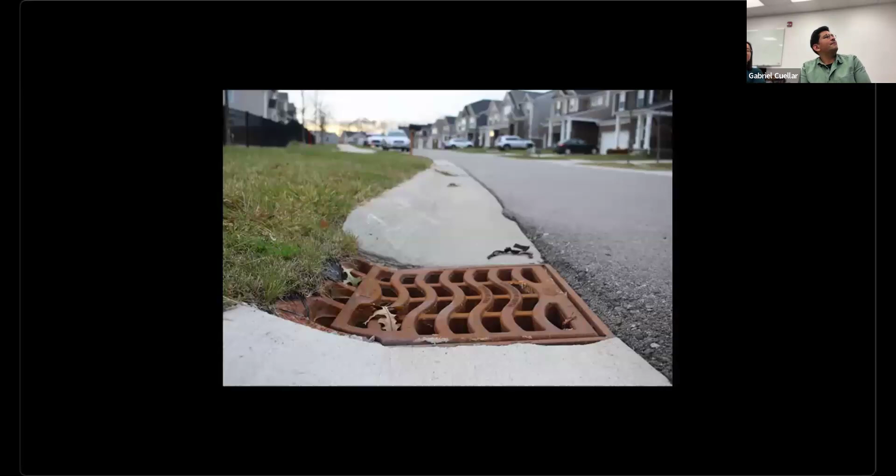As the city of Ann Arbor develops its new comprehensive plan, disagreements over zoning strategies have emerged between pro-density advocates and neighborhood preservation groups. Considering the broader environmental, social, and historical context of this debate could help guide decision makers.

The Anishinaabe have lived in southeast Michigan for centuries and used these lands around the Great Lakes for hunting and gathering. They call the water Nibi and understand it as life itself, not just a commodity to be used.

When European settlers arrived, the colonists divided up the land with the Jeffersonian grid, with no regard for natural features. Ann Arbor's industrialization and residential development has led to degraded water quality, destroyed habitat, and increased sediment load in the watershed.

In addition to the history, assessing the current stakeholder network was key to developing any design solutions.

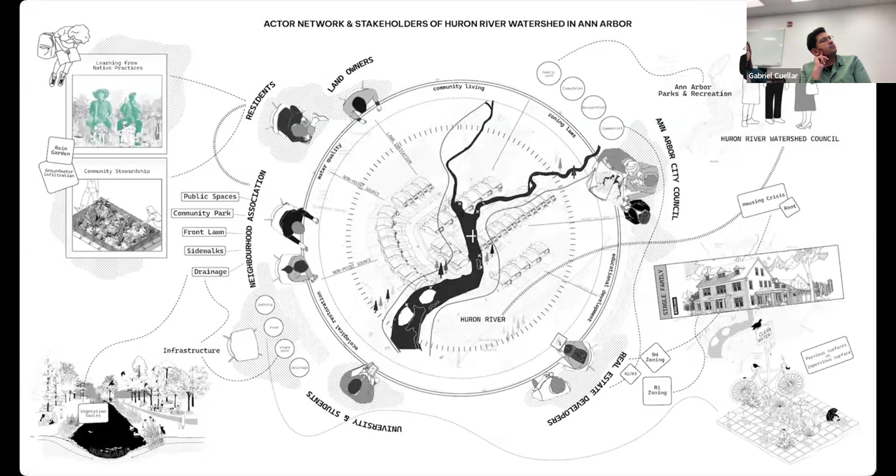Ann Arbor is primarily zoned for residential uses, especially low-density single-family residential, or R1 zoning. Currently, the city requires developers to meet specific stormwater management requirements. In most cases, developers meet the requirements through engineered solutions that socially and environmentally disconnect the community and the land from its role in the watershed.

Adjusting development requirements could transform R1 zoning neighborhoods from places of social and environmental disconnection to places of connection.

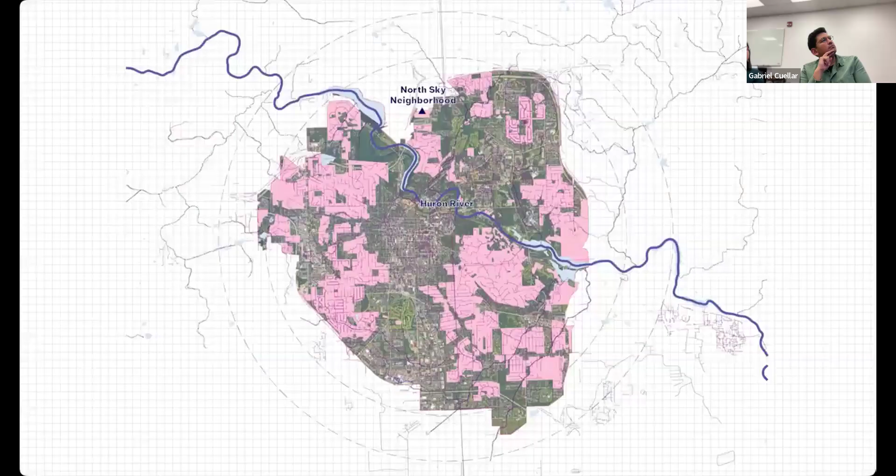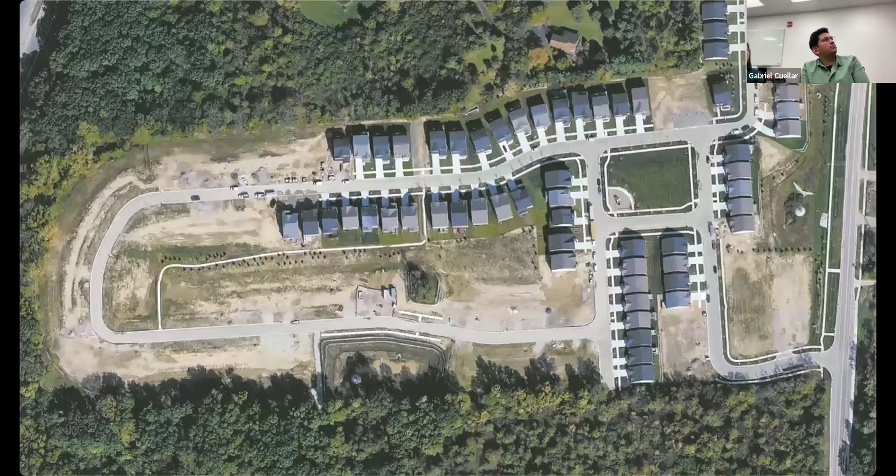As a case study, we selected the North Sky neighborhood, a single-family residential neighborhood in Northwest Ann Arbor. This development was built in 2018 and is largely characterized by its car-centric form, uniform homes, two-car garages, and expanses of lawn.

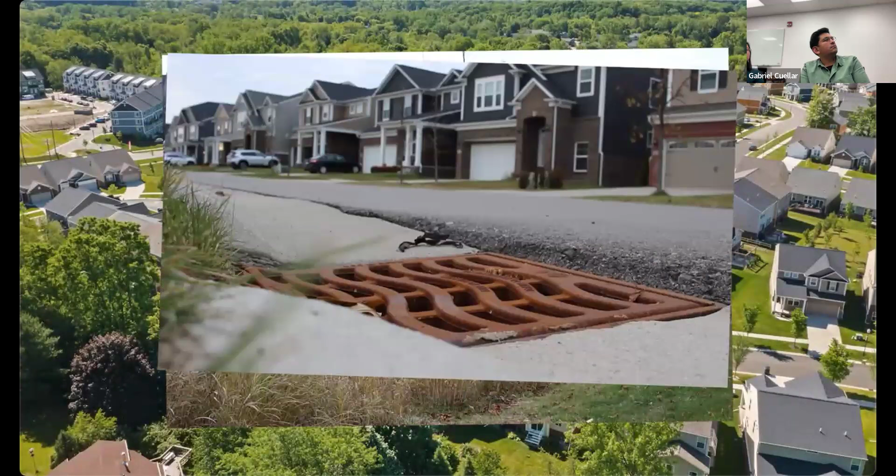Like most R1 developments in Ann Arbor, the stormwater is treated via engineered swales and retention ponds, undergrounded stormwater management, and monocultures of lawn.

Manicured lawns have become a symbol of home ownership in the United States. However, these lawns require substantial irrigation, contribute to water pollution by chemical use, and lack habitat for local pollinators. Our first strategy gradually transforms these lawns into an ecological patchwork of rain gardens.

Like many urban developments in Ann Arbor, a homeowners association currently maintains the turf throughout the neighborhood. To implement the first strategy, the HOA will transform the lawns to rain gardens within all community shared spaces, while leaving a small area of lawn in the community park for children to play.

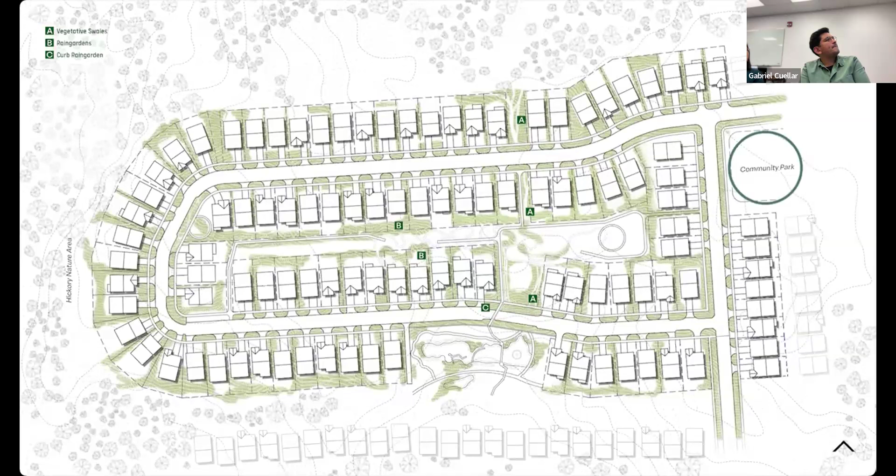Our strategy includes having public gardens, rain garden curbs, and shared vegetation along with traditional grass conversion. This will lead to lower irrigation costs, stormwater credits, and better aesthetics, inspiring other neighbors. As the ecological patchwork grows, the community gains biodiversity, healthier soils, and a strong identity connection to the watershed.

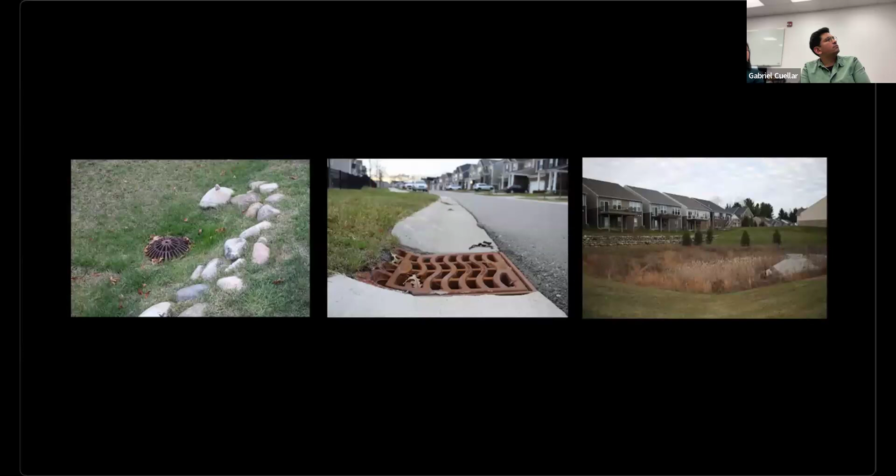Our second strategy reimagines how stormwater travels throughout the site. As opposed to traditional methods of hiding stormwater in underground pipes and surface drains in the turf, our intervention creates a swale wetland network that also acts as a stormwater commons for public use.

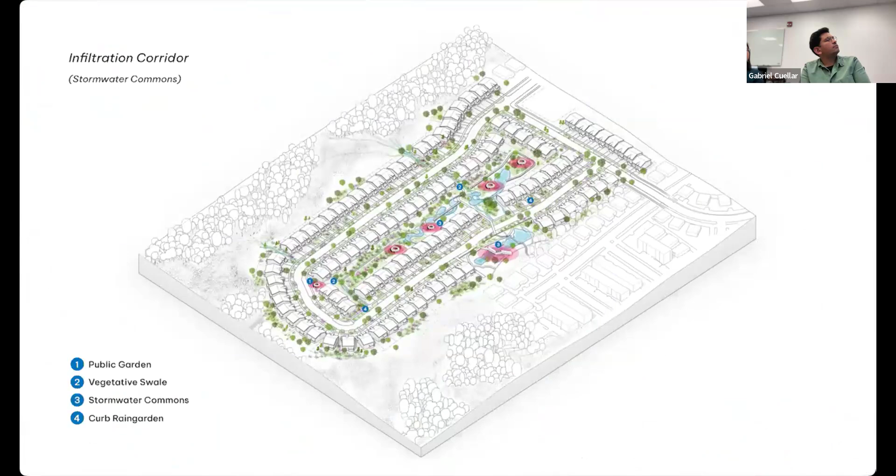The corridor decentralizes the runoff and creates moments of interaction with water throughout the site. The infiltration areas absorb more water into the ground, which allows the large retention pond on the south side of the site to become smaller and act as a community public space rather than a fenced-off basin.

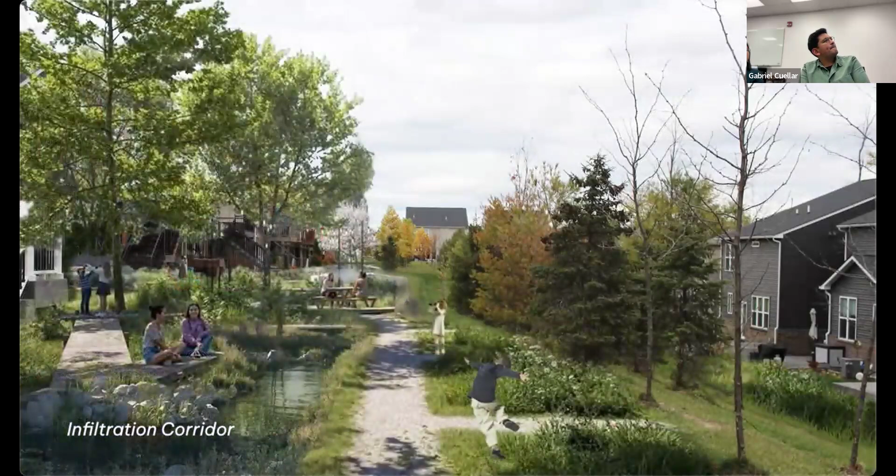These community spaces instill a feeling of shared responsibility for the watershed and their local ecology. Our strategy acts in multiple segments with the swale network to guide runoff and community spaces for people to interact more closely with water.

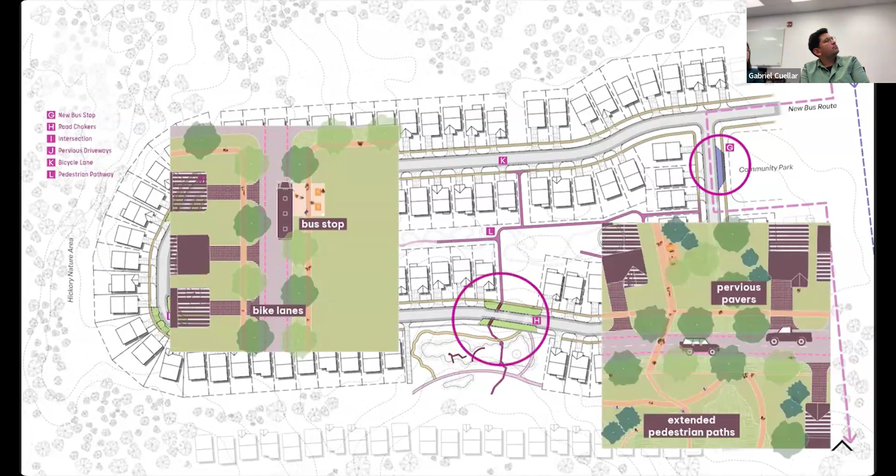Our third strategy provides mobility modifications to encourage alternative modes of transportation and reduce the negative impacts of car centricity. To encourage use of public transit, we propose introducing a new bus stop to routes 22 and 63 at the existing community park. We also recommend adding bike lanes and expanding the existing pedestrian pathways throughout the public spaces.

To reduce negative impacts of car centricity, we propose replacing impervious concrete driveways with pervious pavers. Additionally, road chokers will be added at key pedestrian crossings to slow car traffic and beautify the pedestrian spaces.

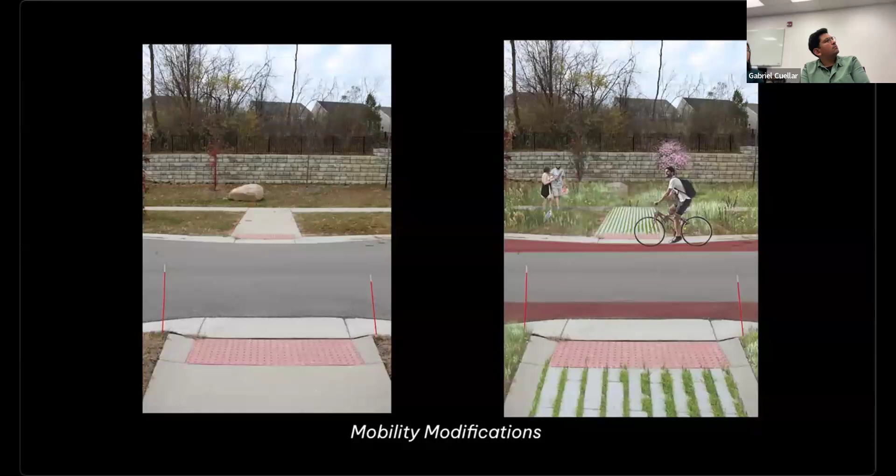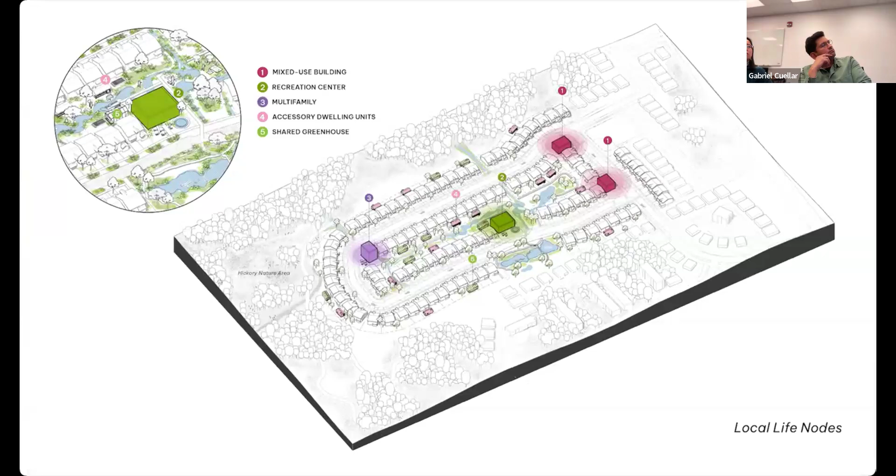Our final strategy aims to transform R1 bedroom communities into places where daily life happens locally. This strategy could be implemented into future urban developments, but we have reimagined what this would look like within North Sky neighborhood. A neighborhood community center becomes a hub for gathering, workshops, and casual interactions. Small businesses like cafe and corner market anchor walking trips and build social ties. These nodes increase walkability, allow more density, and reconnect residents to the neighborhood community.

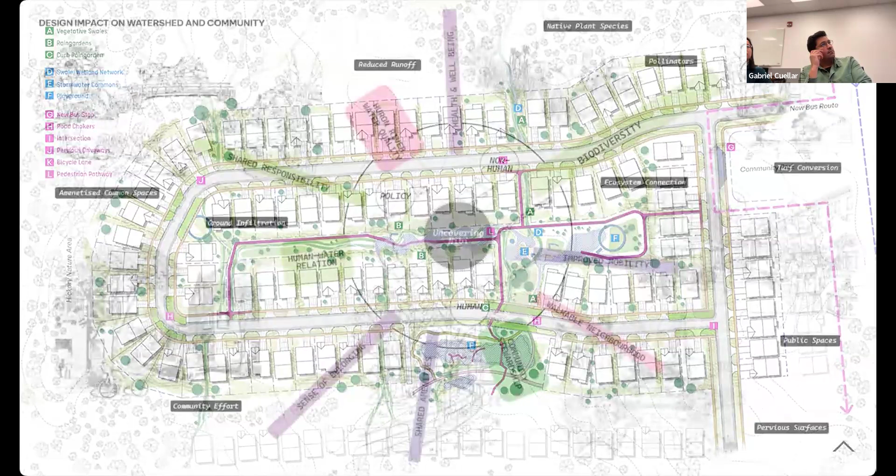All of our design strategies can be used individually or as a combined system to reconnect the residents of Ann Arbor with the Huron River watershed. The North Sky neighborhood gives us an opportunity to see the impact of our design and rethink how one residential area can become a model for many.

A place where an ecological patchwork, infiltration corridors, mobility modifications, and local life nodes build our connection to the watershed. These scalable strategies reveal what neighborhoods across Ann Arbor can look like when stewardship and watershed guide design.

The next presentation is... I will share. You introduce yourselves? Yeah, okay.

Hello everyone, I'm Pallavi, I'm from Pakistan, Karachi. I'm Dwanil from India, Mumbai. Hi, and I'm Mahalij, and I'm from Pakistan.

Today we are discussing the tension that is caused between the university and the city. We were trying to understand how the future of the city is developing, and how the university is about to expand. So how can we understand the terms of such development and what impact it has on Ann Arbor itself? Thank you for the opportunity.

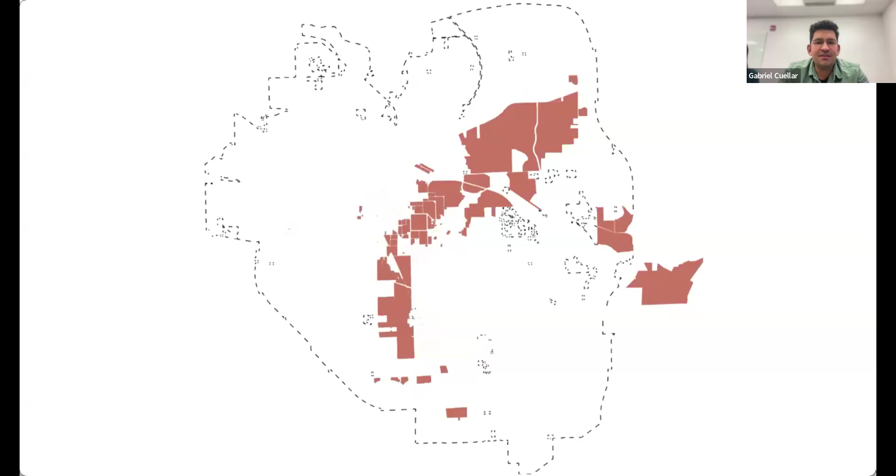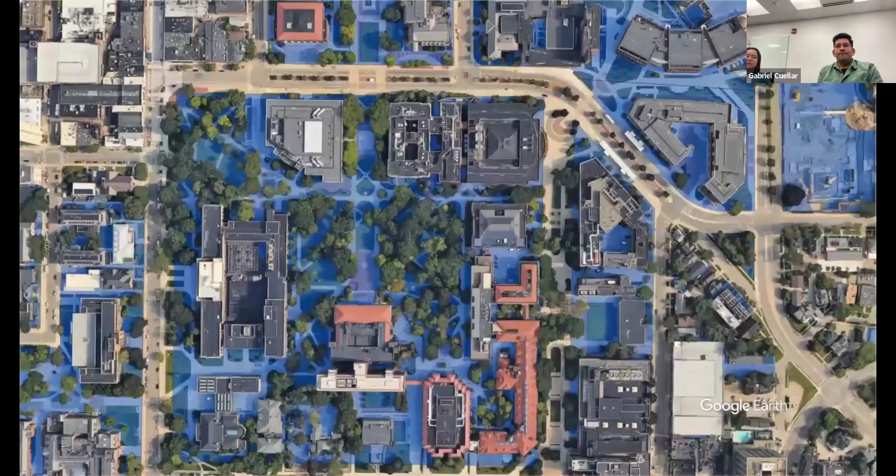One, two, three. Ann Arbor is shaped by two worlds growing side by side, the University of Michigan and the city. Their boundaries collide, overlap, and divide the urban fabric. Our project studies the tension between the city and the university. The timeline shows how the University of Michigan has expanded continuously since arriving in Ann Arbor in 1837.

Early land grants and constitution tax exemption allowed the University of Michigan to grow without contributing to the property taxes. Over the decades, more buildings, more students, more jobs, and more services turned the campus into a microcity of its own. But each expansion also meant increasing tax loss for Ann Arbor. With less revenue, the city faces underfunded infrastructure, delayed maintenance, rising pressure on services, and gradual spatial decline.

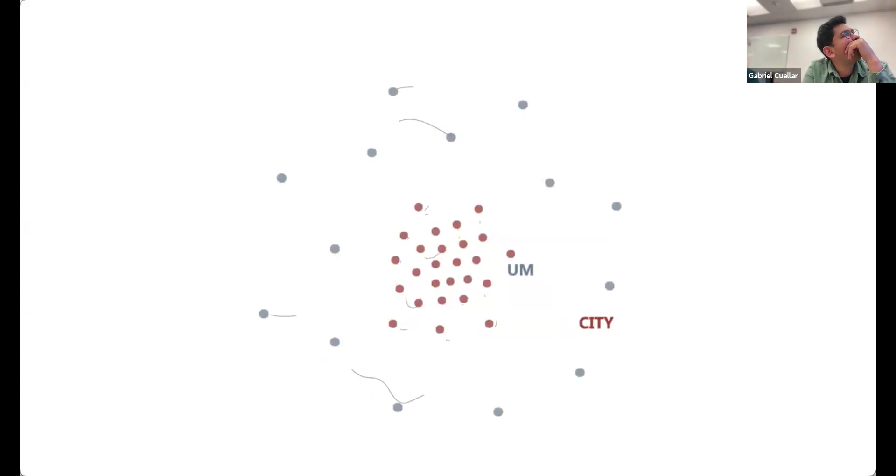So the university's growth and the city's strain unfold together, and this tension sets the stage for spatial differences that follow. Quality: the university maintains a high quality, well-serviced environment while the city neighborhoods face lower upgrades and resource gaps. Quantity: the University of Michigan expansion captures more land for academic facilities, reducing the amount of taxable land available to support the city.

Scale and car dependency: while campus students experience a compact microcity, outside it, Ann Arbor's scale stretches out, generating longer commutes and heavy dependency on personal vehicles. Accessibility: the campus is highly walkable and service dense, while many parts of Ann Arbor rely on limited transit and car-oriented routes. Property wealth: as campus demands intensify, surrounding housing becomes more expensive, pushing affordability farther out.

This diagram makes visible how divided infrastructure is within the system and influencing the planning decisions, shaping the future expansion, and accelerating the suburbanization instead of strengthening the urban core.

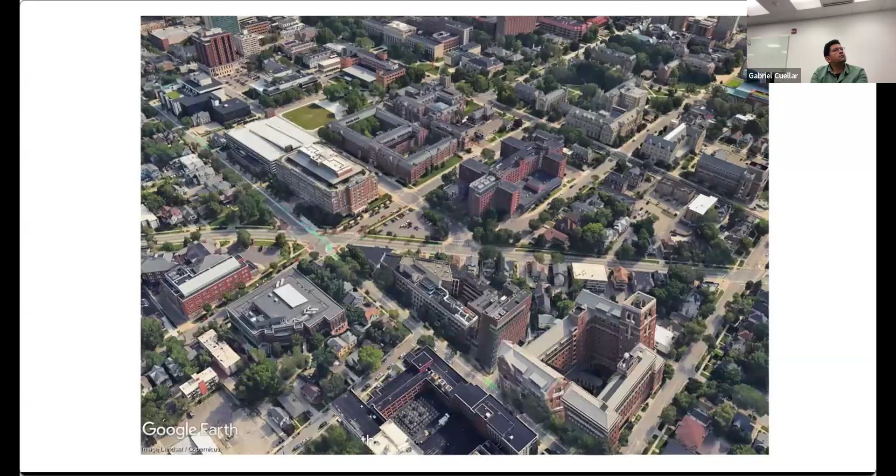If such differences in developing the infrastructure continue, it would completely change the current morphology of Ann Arbor, making it completely lean on the university campus for its growth.

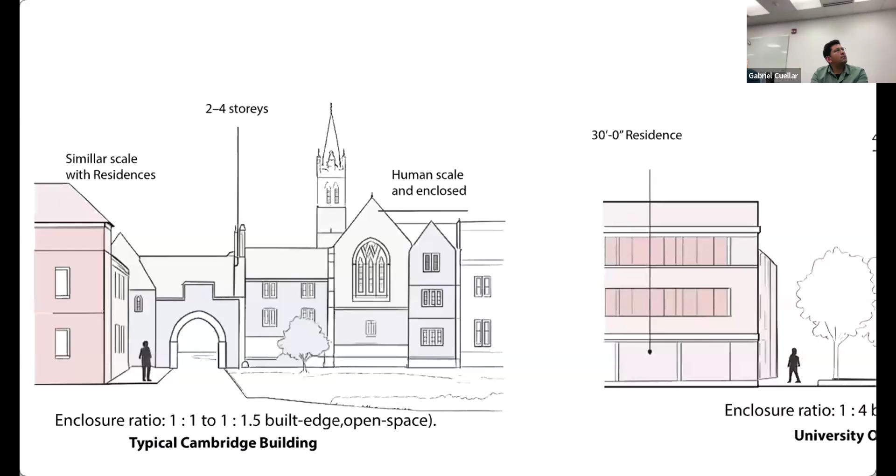We did a case study of University of Cambridge, which is scattered throughout the city to create a vibrant urban experience. As you walk, you see thoughtful design elements like rain gardens and improved walkability that promote community life. In contrast, University of Michigan feels much more monumental, while Cambridge feels much more human-scaled with the university.

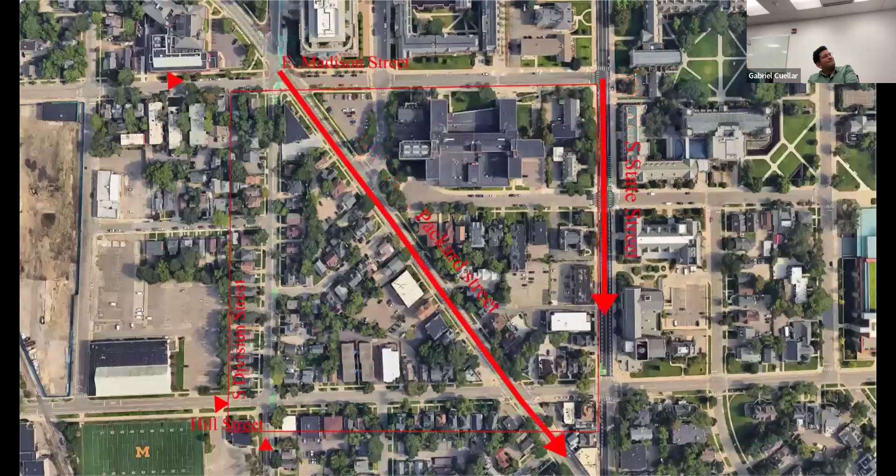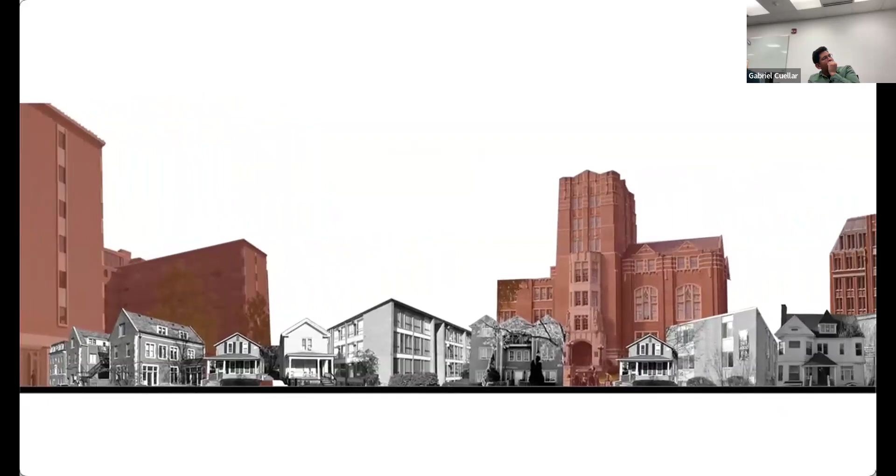The site we have chosen is the South Quad area, located right beside Michigan Union and Central Campus. The primary roads connecting to the site are Packard Street and State Street. It is surrounded mostly by small-scale residential buildings, typically 2 to 3 stories, while university buildings are 8 to 9 stories tall. This contrast creates edges that feel abrupt rather than gradual, reducing walkability and making the street experience feel less comfortable or human-scaled.

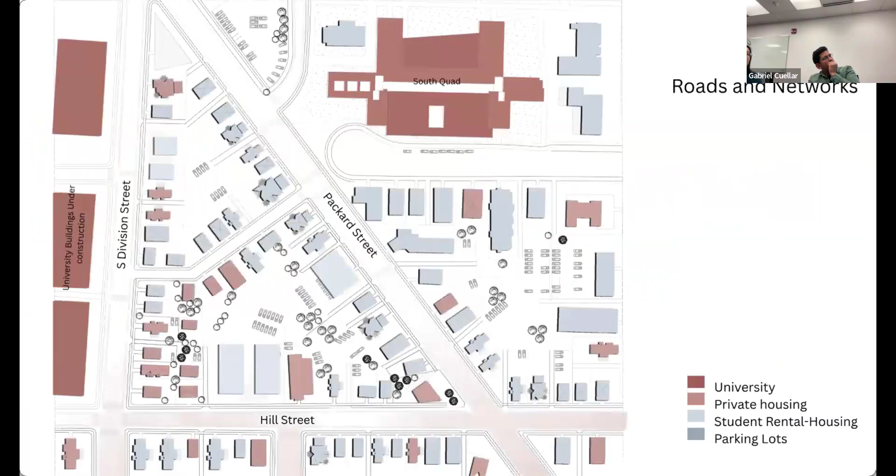Looking at the plan, it has 90% of its population as student housing and 10% private owners, with a parking lot situated in the center.

Our vision connects the university and city through three key pieces. The first is the university cluster, where we place small thematic academic and housing hubs within the neighborhood with public cafes and courtyards, creating a positive campus presence where people live. Second is the civic courtyards.

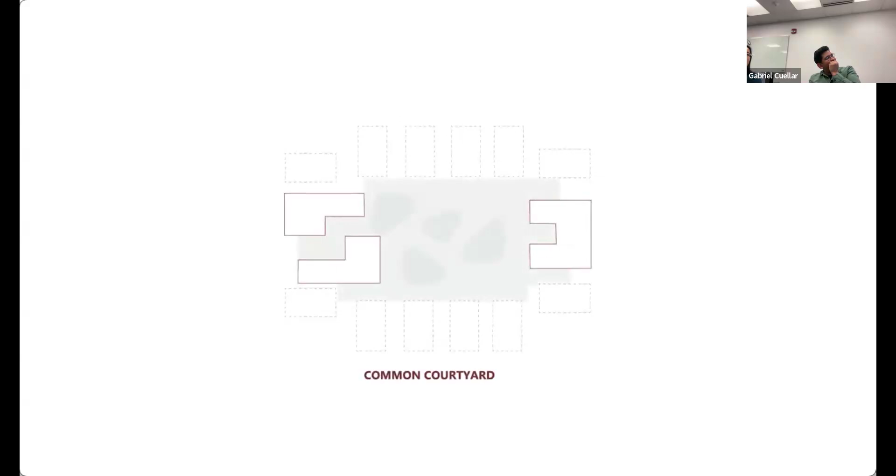At the central intersection, we build a flexible public square for markets, classes, and concerts - neutral ground bordered by shared amenities like reading rooms and daycares.

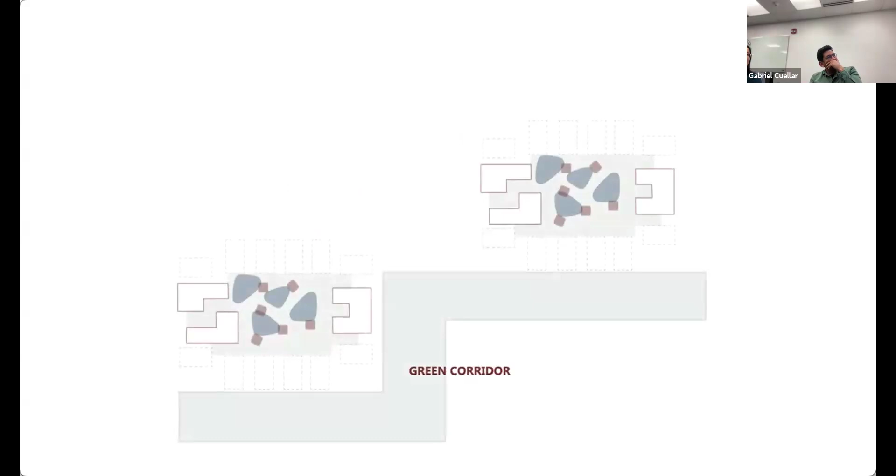Third is the green and social connector. This will be a continuous, beautiful pathway with wide sidewalks, bike lanes, and green gardens - the shared ecology spine that ties everything together into connected communities.

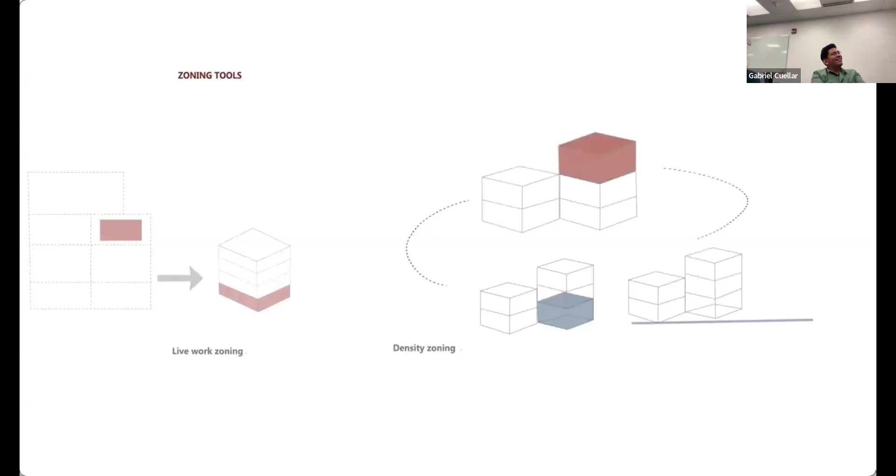Our design is powered by four smart zoning tools. Density bonus: developers can build taller if they include public courtyards or affordable housing. Neighborhood zoning: homeowners can add a small shop or rental units, bringing cafes and services to the block.

Tax abatement for rehabilitation, renovation, and any building with community spaces, with property taxes frozen for 10 years. Stewardship lot incentives: dedicate part of the lot as a public park and get a permanent tax cut.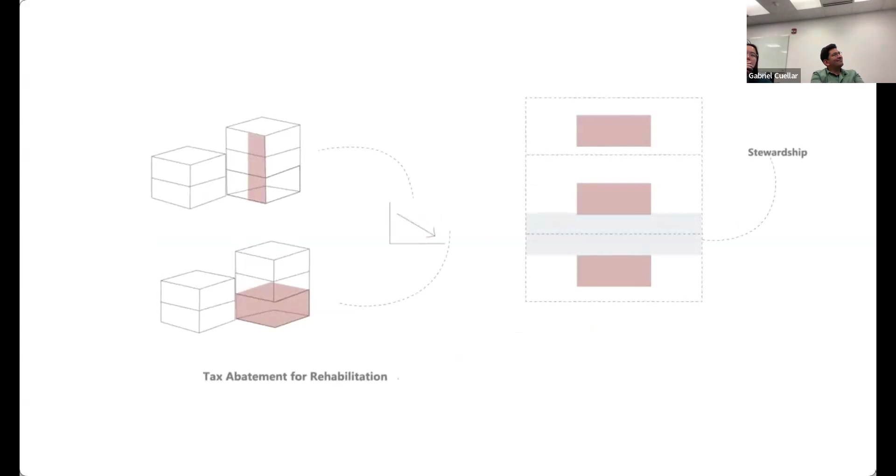To make a scattered university model work in Ann Arbor, we introduced 5 different steps. The first step is creating development agreements, where the city and university formally set the rules for land use. Then the university will make sure all sites are in the transition corridor.

Instead of buying land outright, the university can use land leasing. Community benefit agreements ensure that public spaces and affordability are built into every project. Finally, public-private partnerships allow the university, city, and developers to co-create mixed-use buildings.

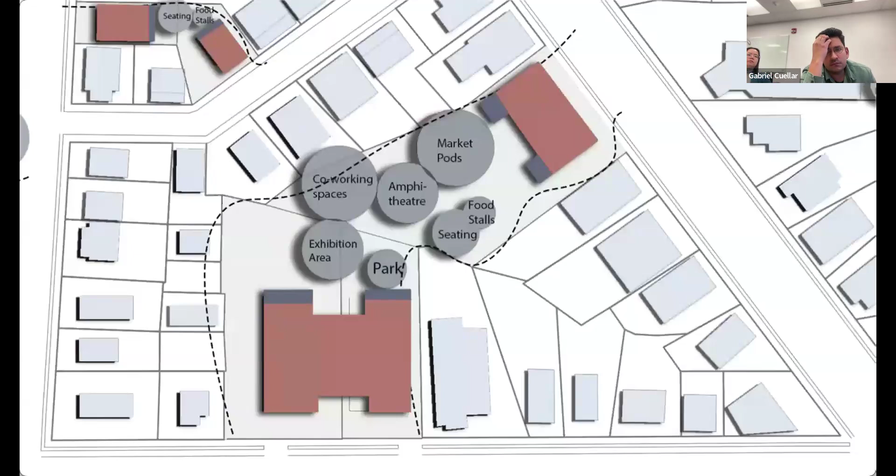The university can come to different sites across Ann Arbor with its ground floor for mixed-use purposes, and considering the size and scale, it can have different sorts of activities, from market pods to seating and food stalls.

The Packard streets will transform from dividing roads into a shared heart of community. In phase 1, we will redevelop key sites into new courtyard buildings.

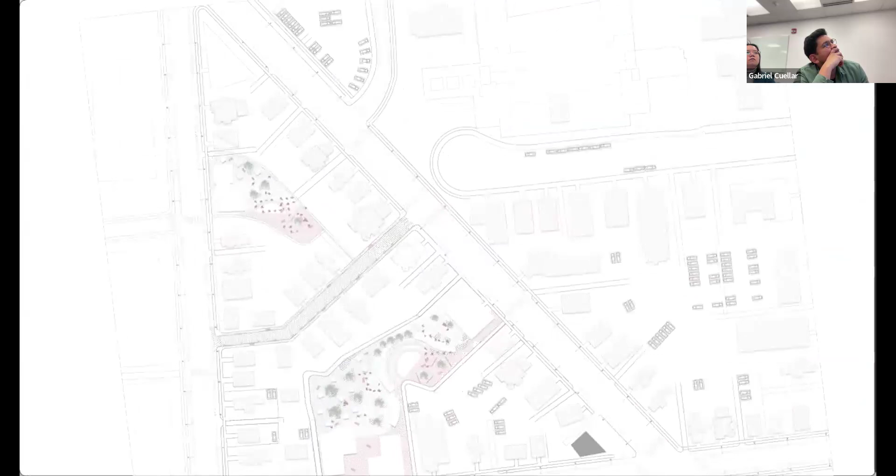These courtyards will house pop-up community pods for workshops and exhibits, while the ground floor will become public cafes and exhibition halls, spilling life onto sidewalks. Portable kiosks will arrive, bringing coffee, food, and small markets, creating instant energy.

We will build the foundation, installing a dedicated pedestrian promenade protected by lanes. Bioswales will line the street to manage stormwater over time.

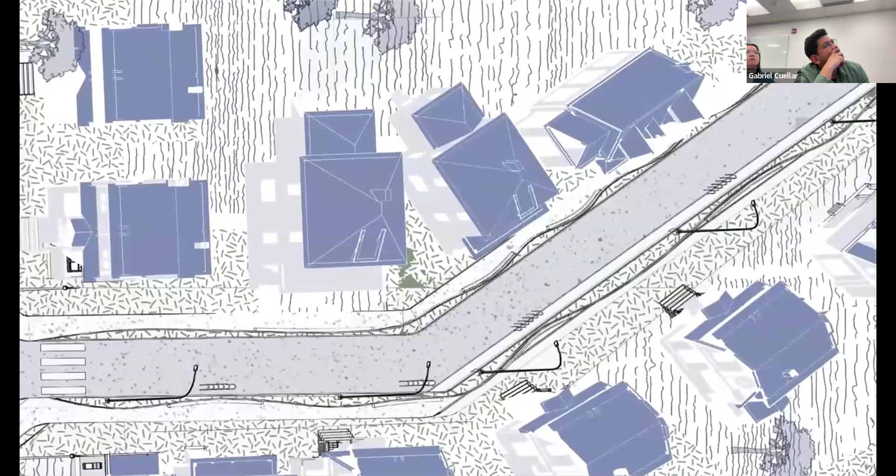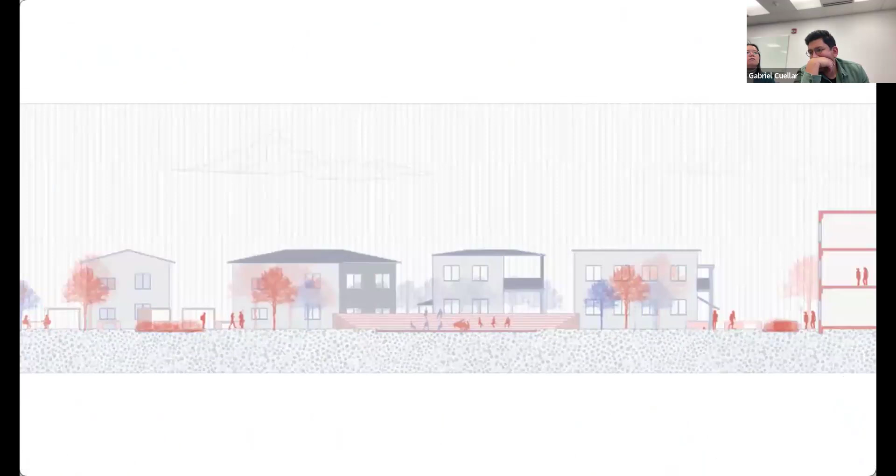The city will mature into a resilient ecosystem. The bioswales will grow into lush green gardens, the courtyards will become established community anchors, and the continuous pedestrian-friendly green street will function as a primary connection spine - a thriving green corridor where university and city are seamlessly woven together.

The connected system will attract new investment. Underutilized sites along the corridor will transform into mixed-use academic and housing hubs, expanding the university's presence without expanding its footprint. The continuous green network will become the city's natural cooling and flood management system.

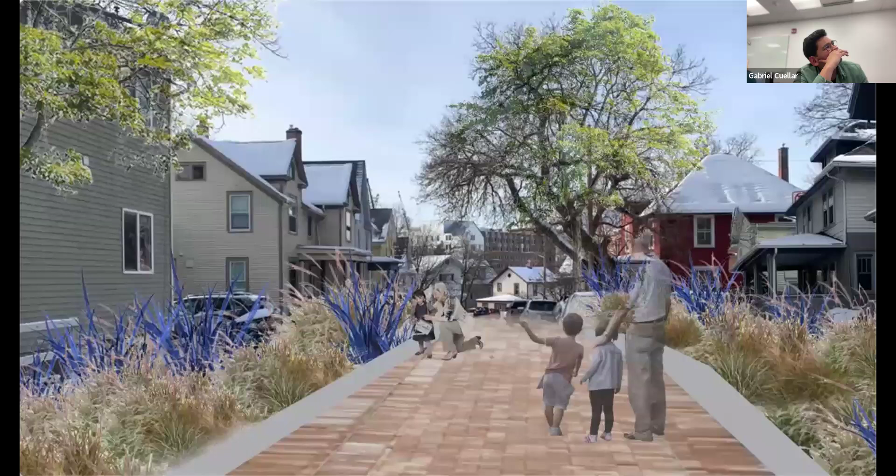Private yards will link to public bioswales, creating a district-scale watershed. The model will replicate as other Ann Arbor neighborhoods adopt the corridor courtyard toolkit, making the entire city a walkable, resilient, and socially integrated ecosystem.

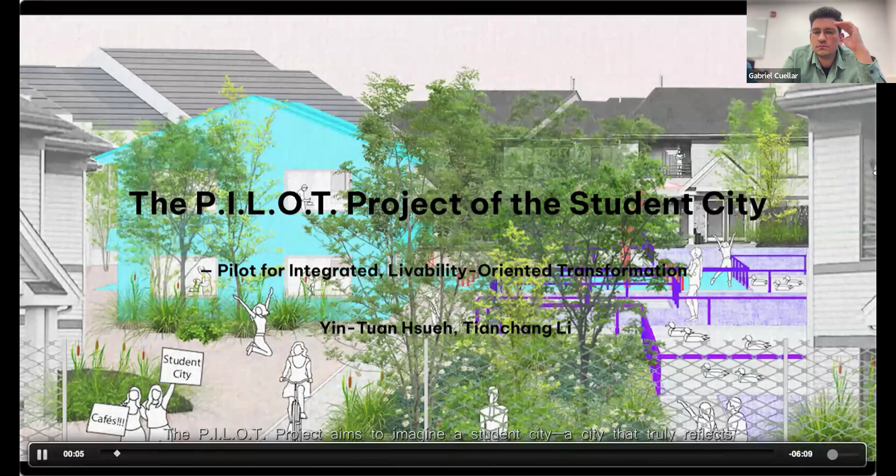The PILOT project aims to imagine a student city, a city that truly reflects what students love and need. Our focus is Ann Arbor, Michigan, one of the most livable cities in the United States, also a place fundamentally shaped by the University of Michigan. 45% of the city's residents are students.

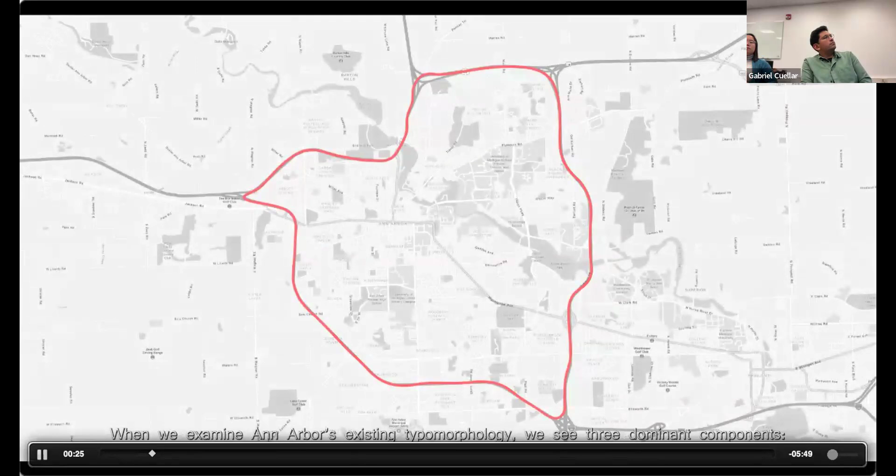When we examine Ann Arbor's existing typomorphology, we see three dominant components: single-family housing, traditional street retail, and campus tissue.

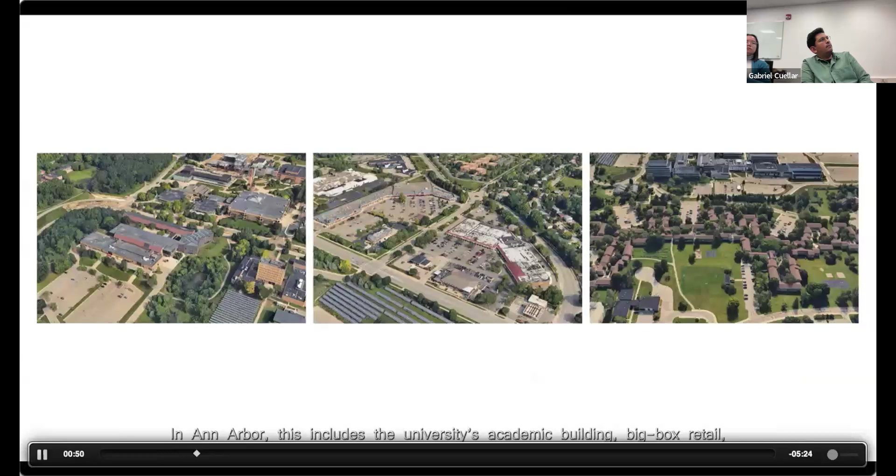So what is campus tissue? Brenda Case Scheer frames suburban morphology into three categories: campus, static, and elastic tissues. Campus tissue refers to large pieces of land. In Ann Arbor, this includes university academic buildings, big box retail, as well as the vast monofunctional residential zones, which are home to the majority of Ann Arbor students.

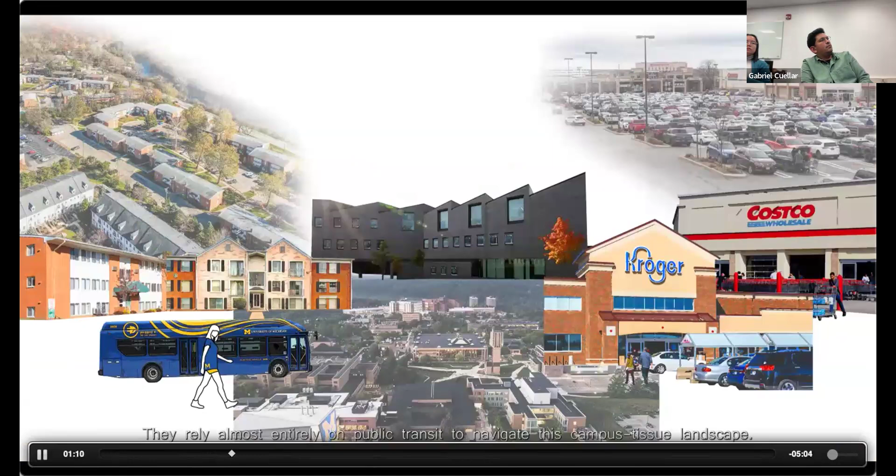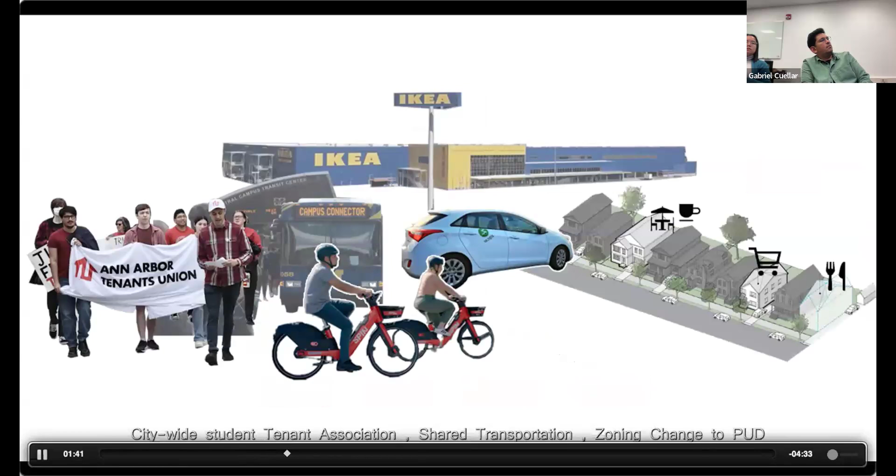So where is the tension? Students have limited mobility. They rely almost entirely on public transit to navigate this campus tissue landscape. Students contribute rent, tuition, and sales taxes. However, their daily life, from studying to entertainment, is concentrated along commercial streets and suburban plazas that are difficult to reach.

To work with this condition, we propose three tools: a citywide student tenants association, shared transportation, and zoning change to PUD. A citywide student tenant association helps students organize and advocate for what they truly need. A shared transportation system frees up underused parking and roads. A PUD zoning change allows this space to transform into activity areas and mixed-use programs.

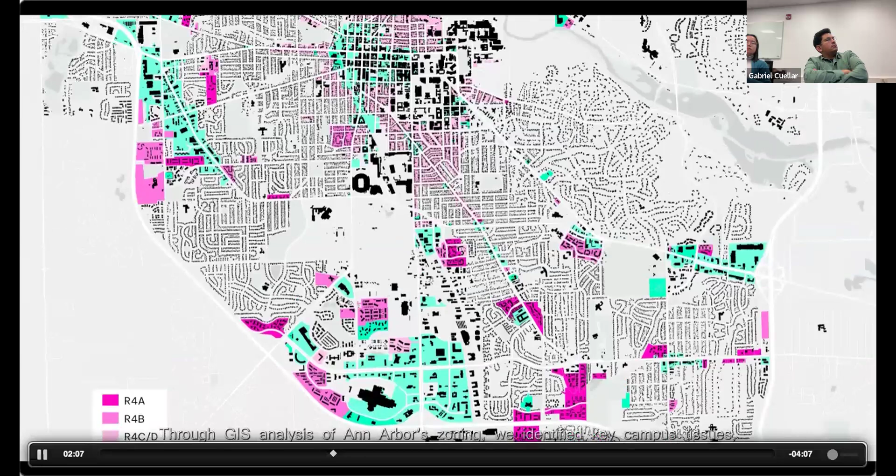Through GIS analysis of Ann Arbor's zoning, we identified key campus tissues: R4 residential areas. R4 is predominantly student housing. However, it contains oversized parking lots, offers only housing, and sits far from commercial areas.

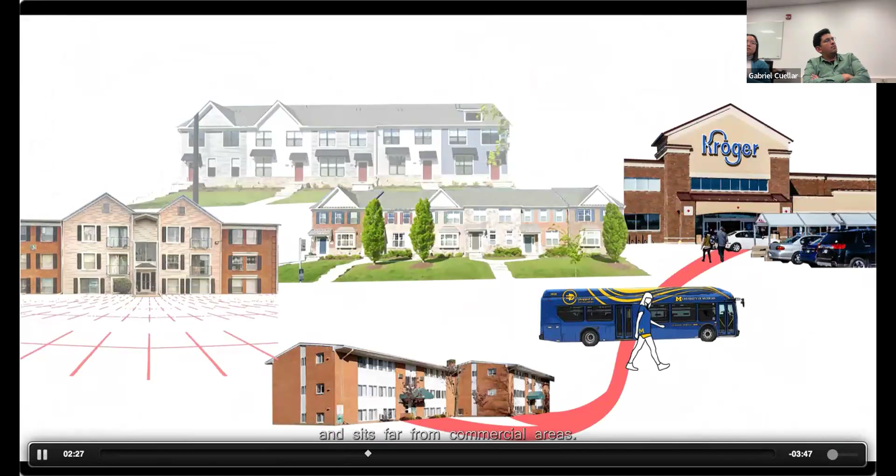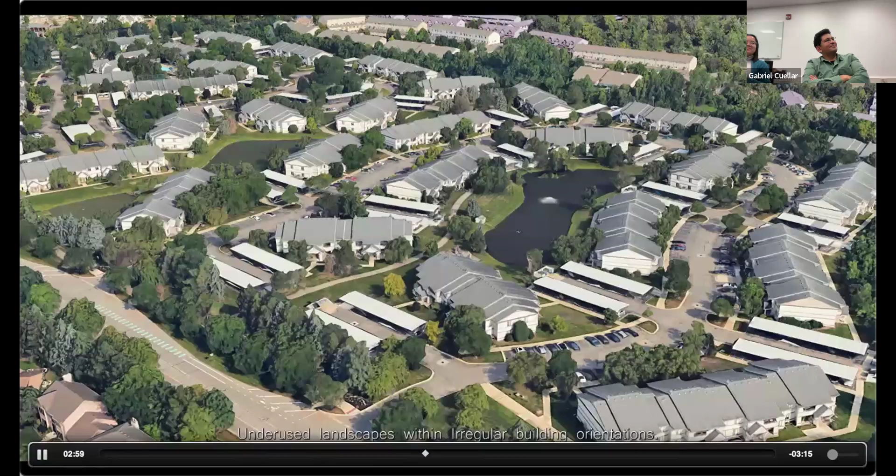To explore how a campus tissue site can be reorganized, we selected the Valleys of North Star, one of the R4 areas in North Ann Arbor. At first glance, North Star looks ideal: beautiful houses, lawns, and a swimming pool. But beneath these images, we see the real conditions: far from central Ann Arbor with very limited walkability, a highly monofunctional area with enormous amounts of parking, underused landscape, and irregular building orientations.

Our strategy is PILOT: Pilot for Integrated Livability-Oriented Transformation. PILOT proposes a multi-layer system of strips, connection, and points. This framework is intentionally broad, a radical pilot project meant to reorganize the pattern of campus tissue to add mobility and livability to this monofunctional environment. By sequencing the design from strips to connection to points, PILOT becomes a framework for rethinking student living in Ann Arbor and restructuring its campus tissue.

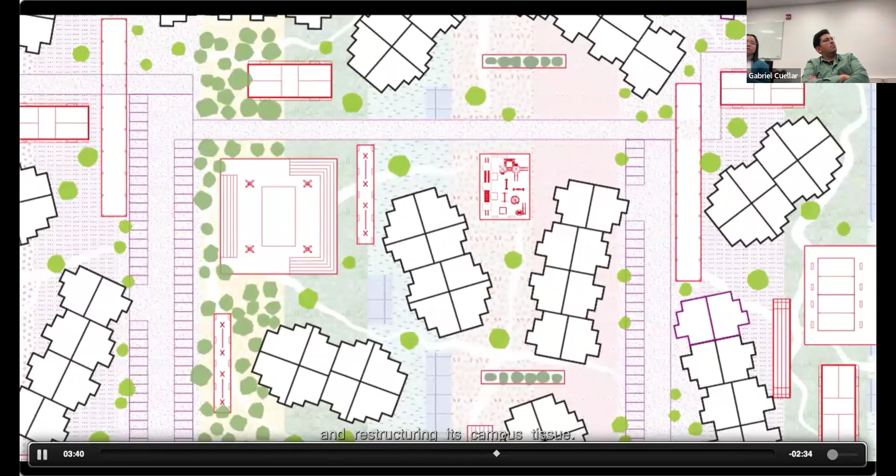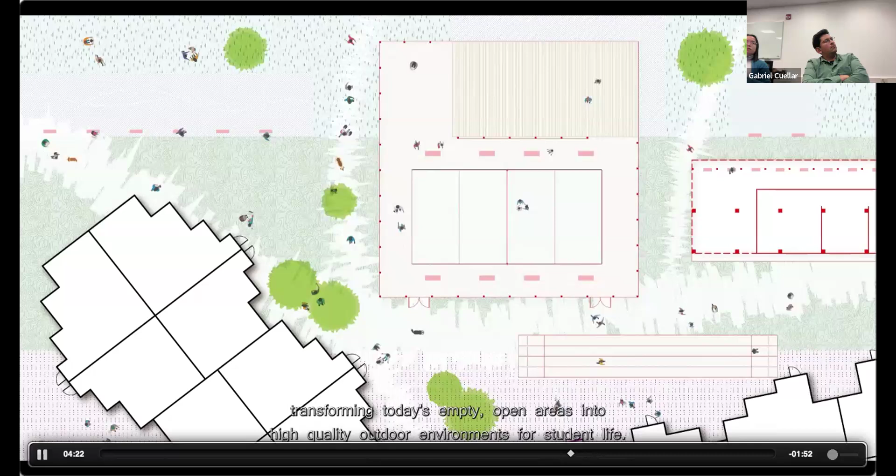Layer 1: strips. Large-scale linear bands establish a new framework that overrides the existing subdivision logic of the campus tissue. As continuous landscape grounds, the strips introduce diverse ecological conditions: grass strips as informal play areas, tall native grass bands as habitat, forest strips for shade and topographic mounds, pebble grounds for flexible gathering, and wetland strips that integrate stormwater functions into seasonal water landscapes. Together, these bands add spatial character, transforming today's empty open areas into high-quality outdoor environments for student life.

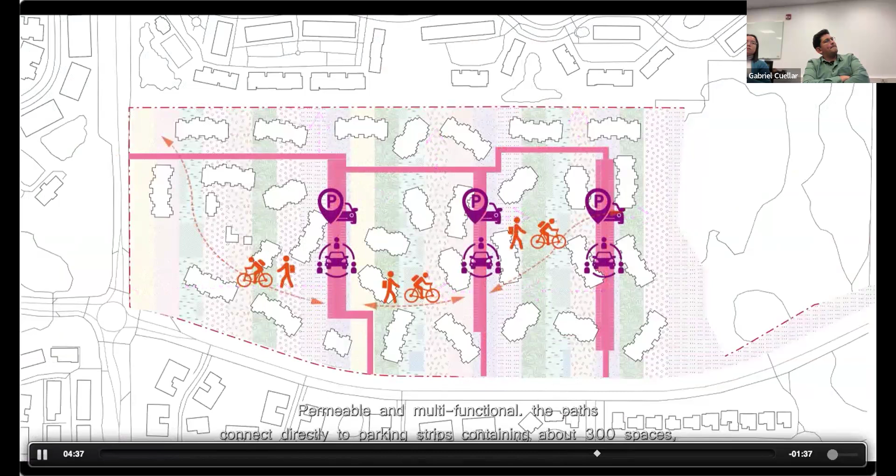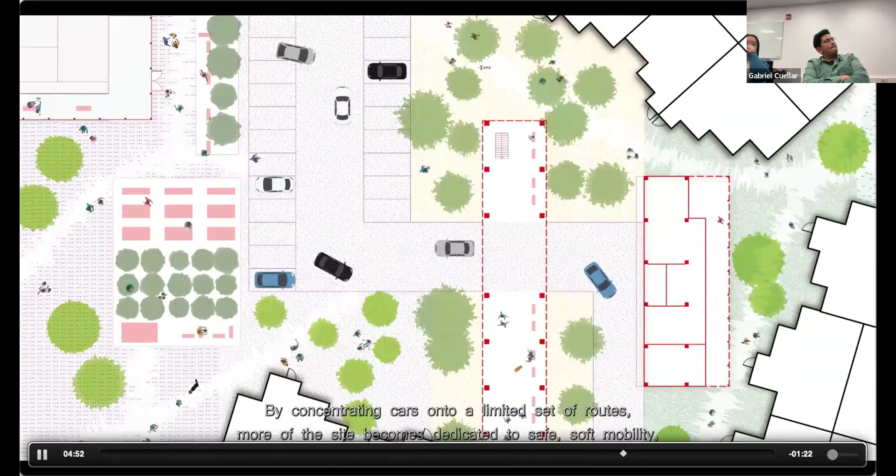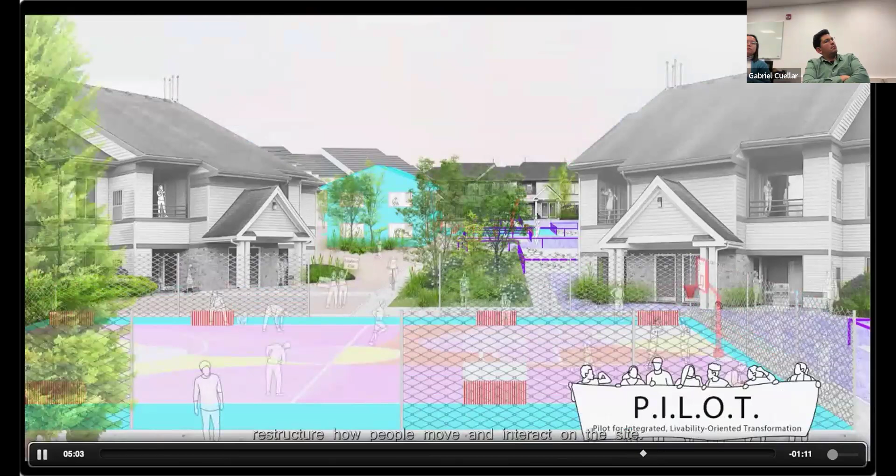Layer 2: connections. A new circulation network spans the strips, forming the primary routes. These connections accommodate everyday movement and emergency access. Permeable and multifunctional, the paths connect directly to parking strips containing about 300 spaces, including shared vehicles for flexible mobility. By concentrating cars onto a limited set of routes, more of the site becomes dedicated to safe, soft mobility, enhancing livability, safety, and social interaction, restructuring how people move and interact on the site.

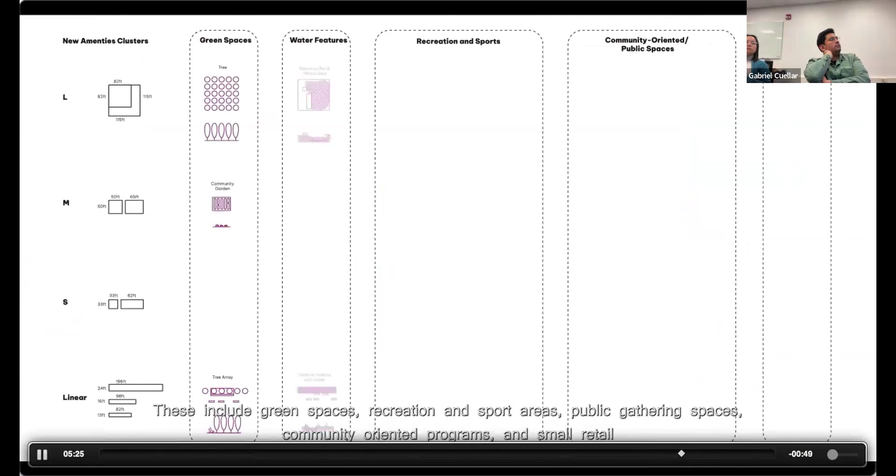Layer 3, points. Beyond the existing and the added housing units, new amenities organized as LMS and linear elements are introduced as points across the reorganized field. These include green spaces, recreation and sport areas, public gathering spaces, community-oriented programs, and small retail.

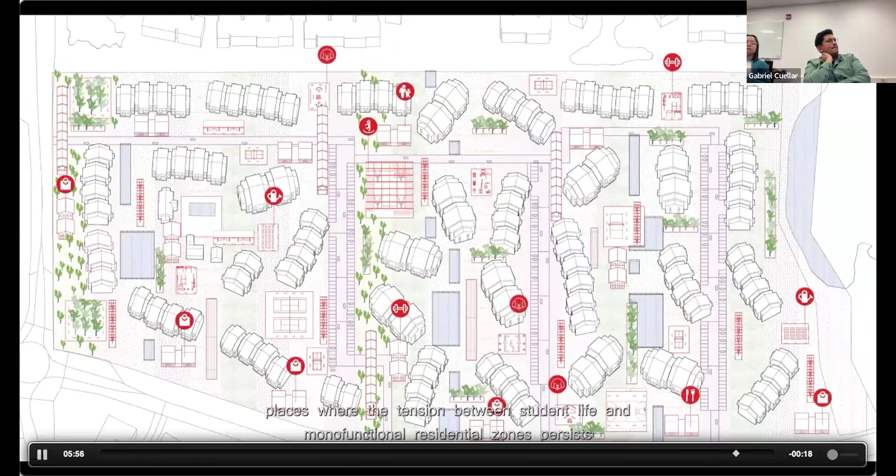Rather than isolated nodes, the points form a hierarchy of uses and spatial conditions, generating a diversified network of everyday convenience and social opportunities that support a more active and livable environment for students. This toolkit, Pilot for Integrated Livability-Oriented Transformation, can be applied to many campus tissue sites across Ann Arbor, places where the tension between student life and monofunctional residential zones persists, especially under conditions of limited mobility. Through this layered system, mobility and livability can finally be restored. We believe that through this approach, we can begin to build a true student city.

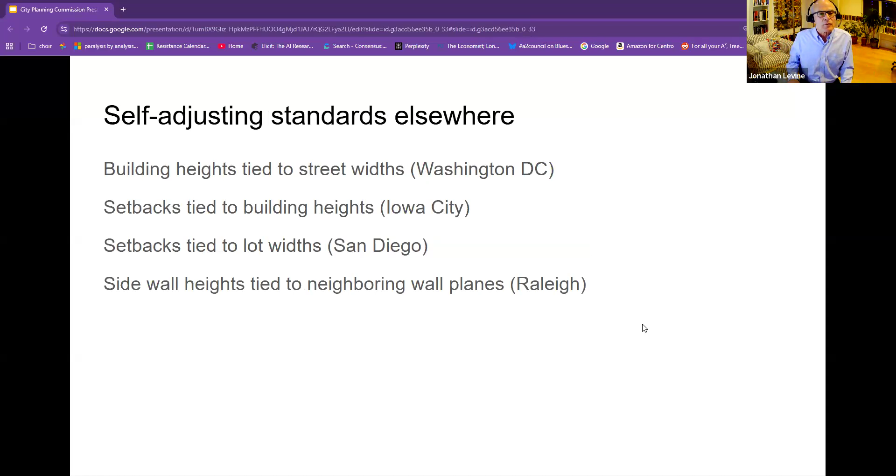Second, we minimize the arbitrary line drawing and its associated politics. Every time you draw a line, it's very, very contentious. Third, we ensure consistency. Whenever the principle holds, the standards would kick in equally. And finally, some of these, not all of them, are linked to the built environment itself. If it's linked to the built environment itself, then there's an interesting principle that the rule self-adjusts over time. So, for example, if setbacks shrink because average setbacks shrink, then the rule for the setbacks shrinks. In other words, if we link to the built environment, we can actually have automatic change over time, which builds in flexibility.

Okay, so if we accept this principle as a possibility, where do we start? Well, I think we can start with the columns, either one zone per category or one zone spanning two categories. So when I read the comprehensive plan, I note that the higher density, higher end of transition is pretty darn close to hub. So it could be, for example, that one zone could span the higher end of transition and hub, or alternatively, maybe it's one zone for transition, one zone for hub. How do we get going?

Looking at the columns, we can apply existing zones. For example, take a D1 zone or take a D2 zone, modify it and use it as a hub zone. Or we can develop custom-made zones. So alternatives A, B, C, and D, all of those are really good possibilities, good places to start. The main thing is, as Noah said, get some facts on the ground.

Do some rezonings, understand that it's going to be an iterative process, or what I've referred to as a terraced approach.

So the principle is you can start with any of these, A, B, C, or D, extend the zone across hub and transition areas, modifying with the self-adjusting rules as necessary. You might say we're looking for a different result along the corridors in transition than we are for the areas near hub.

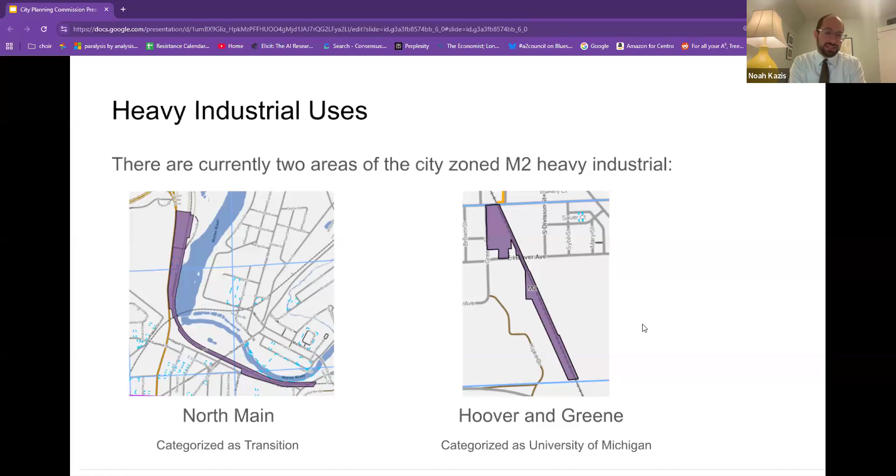All right, well, thank you for that presentation. I have some questions, but as chair, I don't get to go first. So who would like to kick us off? We'll start with Commissioner Adams.

I don't have any questions. I loved and I really appreciate Professor Kazis and Levine. I appreciate you putting these documents together, and I also tend to think and digest information in memo format, so I appreciated the memo as well. There were a few things I teased out of the documents when I was doing my pre-read that I think are important and persuasive for me.

I appreciated that the memo highlighted how our current land use laws and regulations are actively causing harm to the community. We often talk about a housing crisis, but I appreciated the sharp point the memo put on that concept, making the argument that if we can reduce those harms quickly, it's imperative that we do so. I think those judgments are reflected in other documents, but having that pulled out and stated in those terms, I think is important, and it's correct.